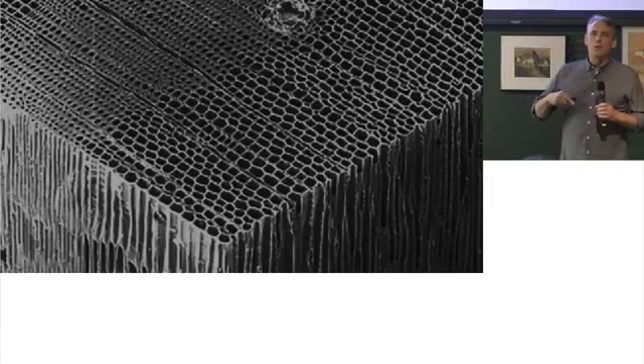And what I like about that is that it's a bit dissociated, it takes away the sort of romance a little bit of the tree as this living thing. It's analytical, and I do that with intention, because I want to talk about wood in this transcalar mode, which is to think about wood as a molecular, biochemical system, as a cellular system, and potentially as an urban system, and possibly a global system, but I'm really reaching at this point, so I'm going to be careful, and I hope you'll forgive me if I overreach.

What I'm interested in is the potential synergy between 2 landscapes which have previously been considered in conflict, the city and the forest. And the thing to remember is that forests hold carbon and cities emit carbon. So the question is, is there some way to game forest growth and sustainable harvest to produce cities made of wood?

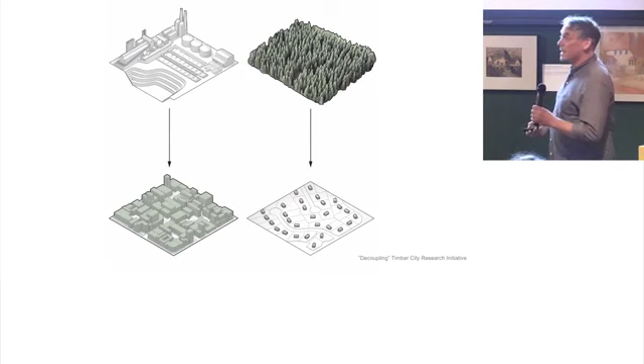Moreover, to try to disconnect, from a building technological and industrial perspective, two landscapes which are linked. The mineral extractive landscape, which produces steel and concrete, is linked to very efficient footprints, urban aggregations, urban building morphologies. And the forest, unfortunately, despite its incredible rich material range, is linked to a low-rise, low structural demand suburban morphology. So how do we break that?

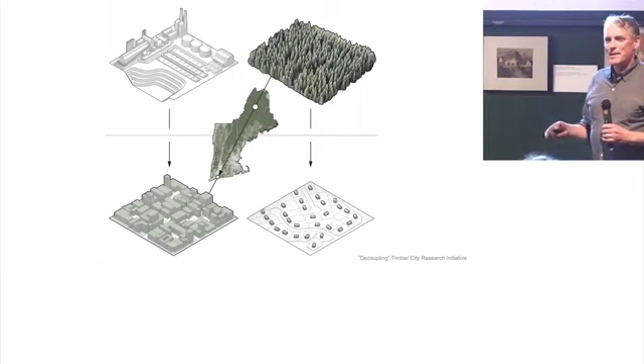What I'd like to propose is that we break it through regenerative architecture, and in particular, a regionally regenerative architecture, which cuts down on potential transport costs, which uses the feedback mechanisms of people living in forests or near forests to know if they're being over-harvested, potentially deforested. We've lost that connection. We talked a lot about that today at the World Circular Economy Forum, how people aren't paying enough attention to their natural surroundings, or I guess disturbed natural surroundings, which is most of the world.

So the question really today is, how do we move from this low-rise suburban morphology, which is America's suburbia, and one of America's greatest and most durable exports around the world. We build suburban morphologies. How do we shift that material into new forms of building, which the Europeans adopted much earlier than the Americans and Canadians, but we're trying to catch up, and produce high-density timber morphologies.

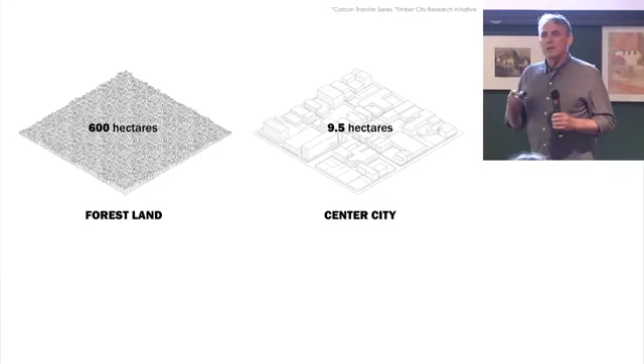I want to run this through because there's concerns about how much wood we have in the world, and whether we can actually build global cities with it, and why we would do that.

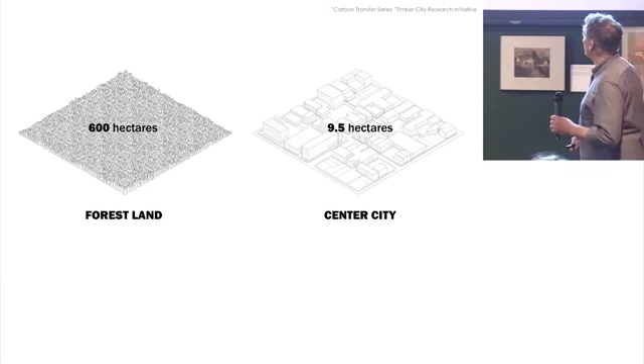So we ran a little scenario where we took a forest stand, planned a sustainable harvest, and planned to build out a city, a four-block district in the city I live in, New Haven, Connecticut. You'll notice the comparative carbon content.

We basically ran this scenario where we made 60 plots. We cut 45, one a year, to build out the buildings based on the growth plan of the city. We also studied the stem succession regrowth of each plot and calculated how much material was needed, and it was proved that the plots basically regrew, and we left quite a bit in reserve.

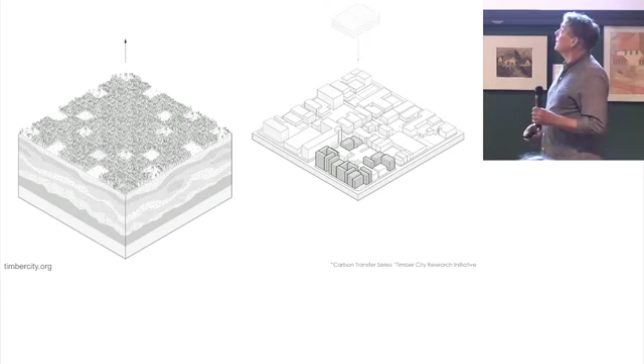We started calculating how much carbon was actually moved out of the city—starting with how much was preserved in the forests we didn't cut, how much was reabsorbed through regrowth of the forests we did harvest, how much was sequestered in the buildings, and most importantly, how much was avoided when we didn't build with steel and concrete, which would have been the conventional building material for that neighborhood.

We ended up with a total carbon bank of about 282,000 tons of CO2, equivalent to about 64,000 annual emissions of vehicles. If you start calculating the current value of a ton of carbon, it's probably worth several million dollars.

If you listen to Bill Nordhaus, a Nobel economist who described the potential for a carbon taxation scheme, he feels that by 2100 a ton of carbon will be worth something like $1,000. So I'm not going to do the math for you, but suddenly we start thinking about carbon as an economic currency, and that forest is a driver incentivized to grow and be protected, restored, and expanded—afforested. That was my long-winded way of starting my lecture, The Carbon Positive City.

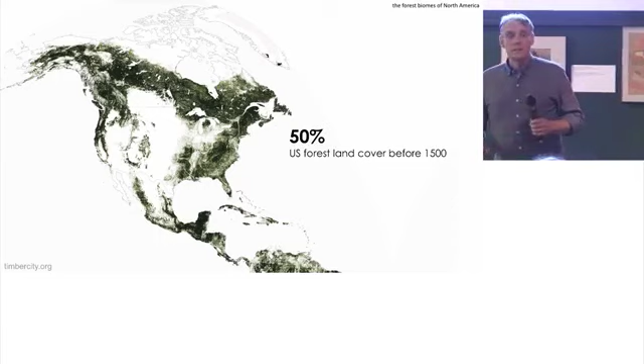In America, for example, in the US in 1500 AD, half of the country was covered with forests. Today we've removed a bit of it—we're down to 33%. Right now, US forests could sequester 11% of all emissions associated with anthropogenic activity. But if we could potentially, with proper forest management, which includes use and harvest, we could sequester and absorb 30% of national greenhouse gas emissions.

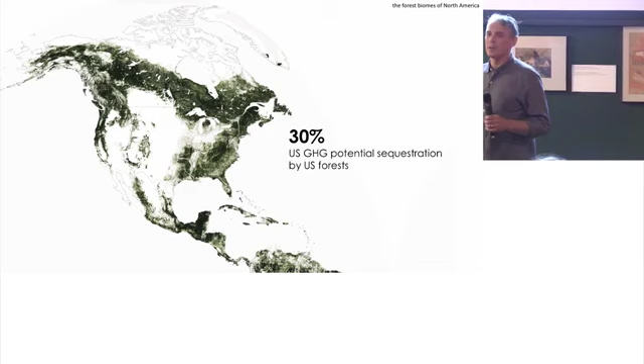You might ask, where's the rest of that going if the forests can't absorb it? We have other forest pools, other carbon sinks and pools, and we'll talk about that in a minute.

We should also start any discussion of the vast usage of timber for building global cities, which will expand inevitably, by talking about what the real forces today of deforestation are. Agricultural conversion—we eat a lot of meat, and we need lots of pasture land. And we mine for lots of things, lots of metals—we overuse metals, actually, as we know from our circular economic friends at Finlandia Hall. And building itself uses a lot of forest.

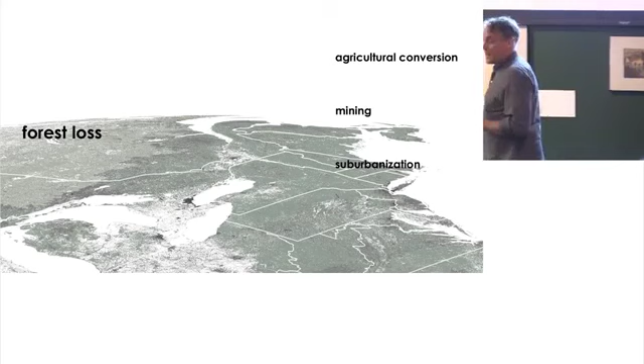And of course, climate change itself has wreaked havoc on American forests. You heard about the Camp Fire in California last year, which destroyed huge amounts of forest and released enormous amounts of carbon dioxide.

But this is really deforestation, because you can cut forests and they regrow. This is what happens when you strip the soils, which have quite a bit of carbon in them. In fact, in temperate forests, about 50% of carbon is below ground. So when you strip those valuable carbon-laden topsoils away, you get an irremediable landscape.

And we're running out of resources. We're talking about this at Finlandia Hall during the World Circular Economy Forum. We're spawning criminal syndicates that dredge illegally and collapse habitats in Southeast Asia to provide the demand for sand for concrete in India and China. And we accumulate waste, which is a problem in itself because a lot of it doesn't biodegrade, but we also remove valuable productive biomass by covering it, and we also cover it with other things, like cities. And we lose the value of those soils. Not to mention that if we keep growing as a global population at the rate we are, we will need three times the land area if we choose to build in the same way that we're building now, at the same densities.

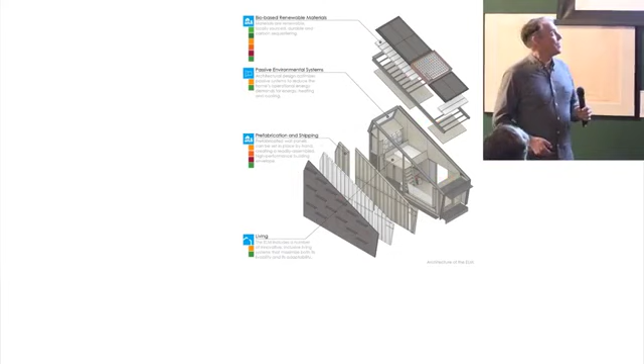Anyway, we followed all the SDGs, the Sustainable Development Goals of the UN Environment Program and Habitat, and we basically built a small building that could be trucked onto the UN Plaza. We learned later, after we'd already committed to this, that we weren't allowed to take a truck onto the UN Plaza, so that got tricky.

It was basically prefabricated in New Haven, and housed a family of 4 for a peri-urban situation where there might be food insecurity, safety issues, power generation insecurity, no grids. So we imagined it was a sort of post-apocalyptic New York. We looked at the climate zone of New York and the material supply of New York, and we went to work.

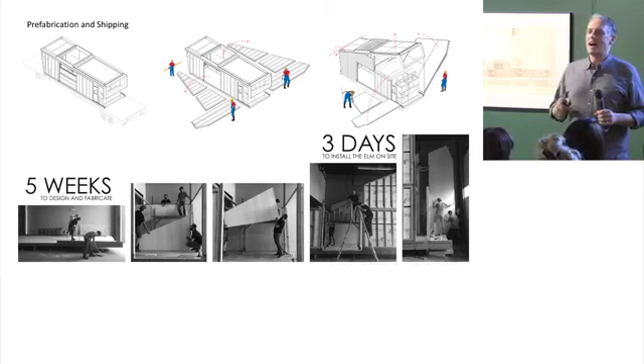We basically designed for about 4 or 5 weeks, and built for another 3 weeks. We started, and in 3 days we moved it onto the UN Plaza. I will never recover from that. Imagine taking a house, admittedly a small one, through airport security - that's kind of what it was like. My daughter, who supplied us with food, almost got arrested by the UN police.

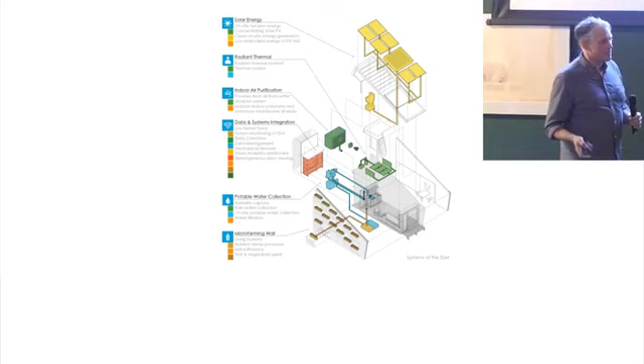We looked at the carbon sequestration or storage, which wasn't much - it's a small building, about 21 square meters, really kind of one story with a loft. We distributed the local material and looked at different systems: solar energy systems, solar generation, radiant thermal energy, indoor air purification, natural ventilation systems, potable water collection through condensation and rainwater harvesting, and finally a farming wall. It was surprising to get it there.

I wouldn't say it's a work of craft, but it was an idea about working quickly with little time, trying to think on your feet, trying to make a decent building, a good home for somebody with a lot of options. You can kind of see the layout, and I won't go into much detail.

This is the head of the Kenyan UN Environment Program, who spent a lot of time with us. He was great, and he actually said that he wanted to move in, which was nice.

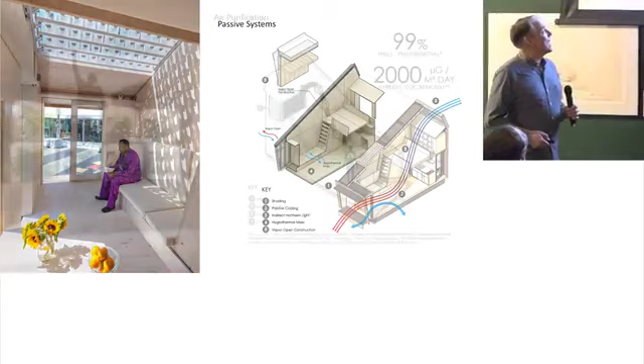We also studied exactly how the air - we measured the air quality, and it turns out that wood has really high air quality once the initial VOCs have basically diffused.

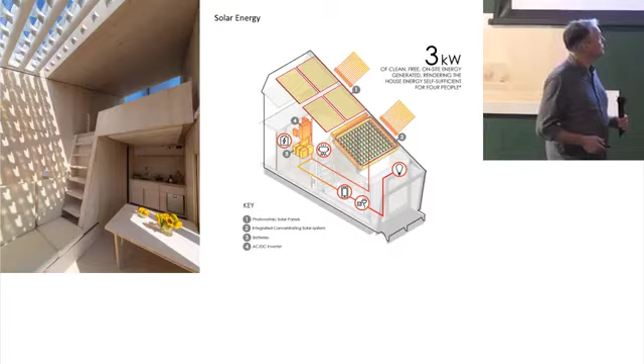This is our little mechanical room, which had 5 car batteries and could basically keep a family of 4 powered, enclosed in their house for 5 days, and produce enough water and enough electricity for that family to live completely self-sustaining. We used a lot of reused materials to make the sidings, and ran out and had to get new material - it was a rush.

We had a team of people in my office, students. We worked with the Center for Ecosystems in Architecture to develop the systems, and we made the plant wall and grew plants in it for over 2 months, producing a pretty decent amount of nutrients.

It was a hit, because people in New York don't expect to find a house on the UN Plaza, and they liked it a lot. This is the Deputy Secretary of the UN tasting basil and eating tomatoes - not the green ones.

It was a good lesson in thinking more broadly about how buildings should perform, both in how they operate and how they protect people and provide them with services, but also how they should use materials from this resource-deprived, increasingly resource-deprived planet.

So we thought about scaling up. And in scaling up, I like to think of a sort of design spirit guide, Charles and Ray Eames. My partner Lisa Gray and I have worked together since we got out of graduate school, and we wish we could collaborate like Charles and Ray Eames, the great furniture designers and filmmakers.

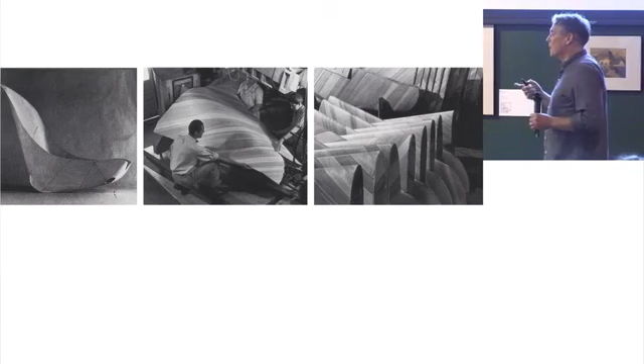What I really like is that the lesson the Eameses learned was something about scale. They made this famous movie called Powers of 10, which I recommend you see, essentially zooming in and out of human habitation on the Earth. Then they carried it into their work, scaling from a leg splint to a chair, to a fuselage for a plane or a boat hull.

They understood that the beautiful thing about architectural design and material thinking is that it scales. It can scale, and you look for the lessons in the iterations of things that scale.

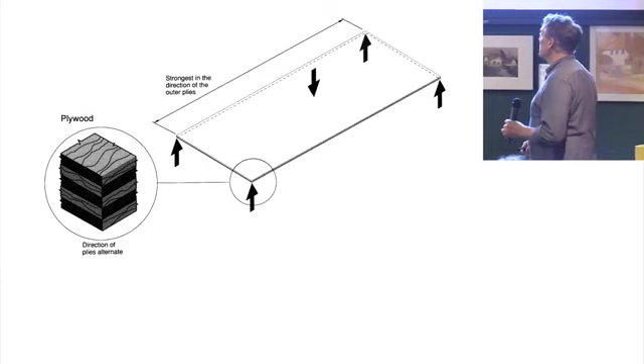So we studied the idea of stiffness in a project we did in the late 90s, renovation of an old firehouse for an acoustical music studio. We bought a bunch of plywood and tried to see how far we could bend it in two directions. How stiff would it be?

We created an acoustical shell, and we modeled it physically, testing it using different techniques of tuned wood mock-ups. We measured it and gave it to a Swiss acoustical engineer who promptly wrote back and said, I can't model this, it's too complex.

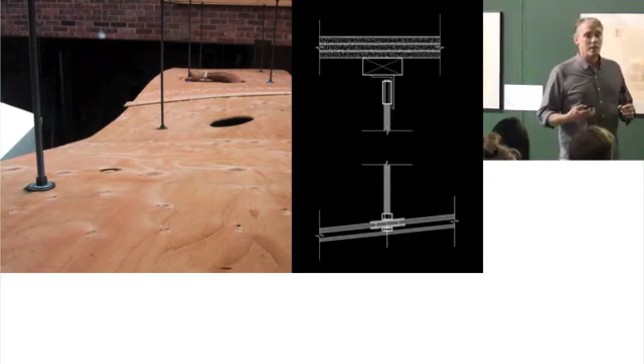So we essentially used these different threaded rod systems to produce an acoustical shell that was acoustically dead for a recording studio and very live for performance, and that was a kind of complex design process.

And we designed an acoustical diffuser at the stage to produce these sort of vanes which twisted and warped to diffuse sound for the musicians, and also to serve as an air return duct.

We stole a little detail from one of Charles and Ray Eames' furniture patterns, this relieving cut where we cut a circle out of the end of a kerf cut, a saw cut, because we found that when we were warping that, it split. But when we could expand the tensile area around a larger surface area, it wouldn't split.

And that became a kind of motif. The room seats about 70 people, and a crush, and the piano you can hear. It's incredibly how live, how rich wood is, and we know it's a great instrument material.

And here was a big room that was an instrument. You can hear the hammers on the piano coming down before it hits the string. And it's so incredible. And we were renovating this firehouse, which had been abandoned.

We were able to, through the brilliance of our client, Nick Lloyd, who runs a record label there, produce essentially a home for himself and his wife, who's a painter, and then their children, and a bar in the basement, and the recording studio, and the record label. Visiting musicians started coming, and it was really successful because of his vision.

And he lived in this amazing sort of relic of 19th century New Haven industrial space. He asked us, once he decided he was going to house visiting musicians instead of making them pay exorbitant hotel prices in New Haven while they were visiting, to build a dormitory with 3 bedrooms on top of the building.

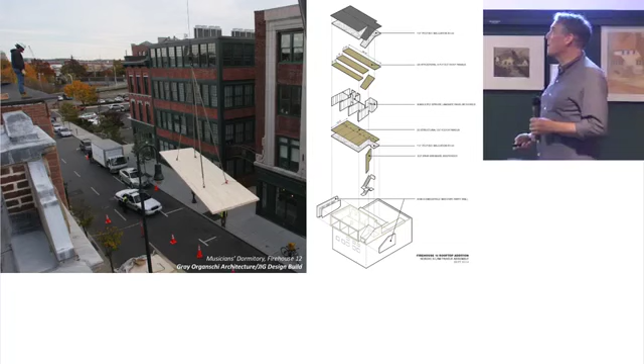And we quickly found out that the building couldn't support it because it was an unreinforced masonry building. So we chose to use mass timber, cross-laminated timber and glulam, to stiffen the building with a light structural material that would essentially keep it up under the load it held.

So we have a stairway up into a hallway with a little seating area for musicians to play, a couple of 3 bedrooms and a little bathroom and a WC. And it's sort of created this new urban lawn on the roofs, and it's created more density.

What was the real discovery was that we could plop this building down on top of an unreinforced brick building from 100 years earlier. A developer contacted us and said, I want to add two stories to the other building next door, and we designed a restraining system using cross-laminated timber cores to produce a hotel two buildings down.

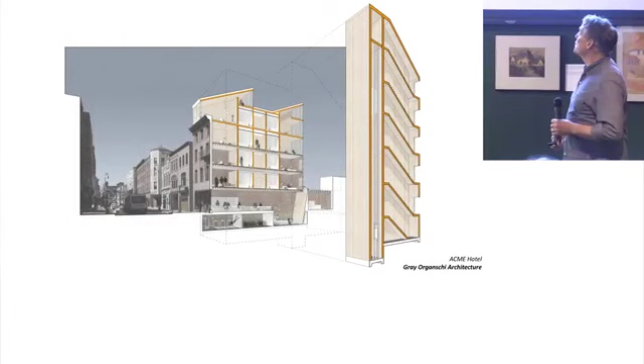Then another developer called us and we designed another building. I won't go into the details, but suddenly the city economic development coordinator was saying, oh my God, we can actually get more density in our city using wood because we can't do it with steel, it's too heavy, or concrete. So this is a great model and we'd like to pursue it.

That brought us to an idea about this notion of structural biomass. Why aren't we using this great plant material that's so abundant and photosynthetically productive? It provides so many ecosystem services. Why aren't we using it for our buildings? Because we know it will regrow, it will regenerate. We've been talking about renewable materials for 60 years.

So we began to study different scales of using round wood to produce structure. That was a school. We worked to produce this apostolic community center for some Jesuit priests who said they wanted to be stewards of the environment, and they wanted to follow their vows of poverty and celibacy.

That reminds me of a funny story. We were having dinner with the rector, and we had a really nice bottle of wine while talking about the design. Another visitor, a lay person, after the sumptuous meal, said, man, if you guys do celibacy like you do poverty, sign me up.

Anyway, the building is a lot of wood. We designed it as a wood structure. The university that sponsored the building decided it wanted to do a LEED platinum building, and we learned that you get more credits for recycled steel, despite the enormous smelting energies that go into steel recycling, than for a wood structure, because wood was essentially politically knocked out of LEED for quite a while. Recently it's been reintegrated through a material credit.

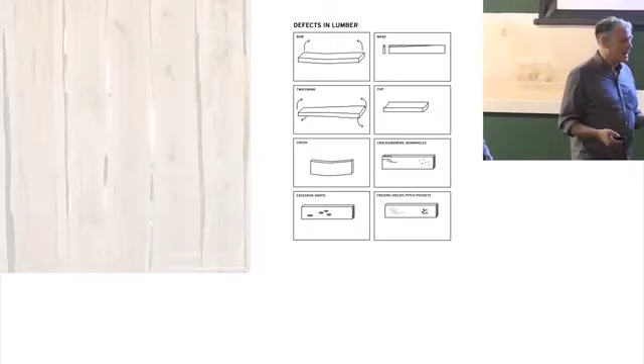So we wanted to deal with this issue of scarcity through the wood, and we studied all the different kinds of flaws that exist in lumber and embraced them, creating screens for the chapel, privacy screens between the public spaces and the more sacred spaces, and the altar and the ambo and the crucifix and the baptistry, the baptismal font.

The idea was to embrace all of the material coming out of the forest, not just the superfine, the sort of rock star trees that everyone wants in their beautiful cabinets in Manhattan, in their kitchens and bathrooms, but to try to understand how we might use solid wood with flaws, with spalting and rot, and consolidate it into a meaningful piece of furniture.

But the thing that really gets us excited is the technology of contemporary wood engineering and glue. When we saw this, I showed this in 2012 at the Aalto Symposium, when we saw this famous experiment, which Juhani Pallasmaa called the man-made tree, we saw it as a sort of repository of lots of adhesives, lots of technically interesting adhesive.

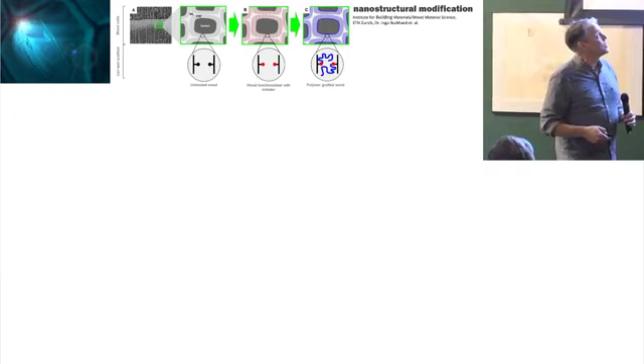And we went to work thinking about all of the different things going on around the world, inventions, the sort of revolution in bio-based materials, biogenic materials, which is happening right here in Helsinki at VTT, or across the Atlantic at the University of Maine in Orono, which found a way to mechanically produce nanocellulose and are pressing panels out of it, or the work by the folks at ETH Zurich on cellular nanostructural modification of cell walls using polymers and mineralization to create greater rot resistance and fire resistance and all these kinds of exciting things.

And these different techniques of adhering wood - we're even starting to look at lignin-based glue so that we're not actually using fossil hydrocarbons to make glue. And then Achim Menges' work at the Institute for Computational Design, where he's looking at the natural hygroscopicity, the water-loving character of wood, and how it can change to produce apertures activated by moisture changes.

But I like the dumb stuff - the stuff that's ready at hand that we're making. We've been making glulam beams for a century. We've been making CLT for 25 years. Petra, you can correct me on that, but it's been decades we've been doing this stuff.

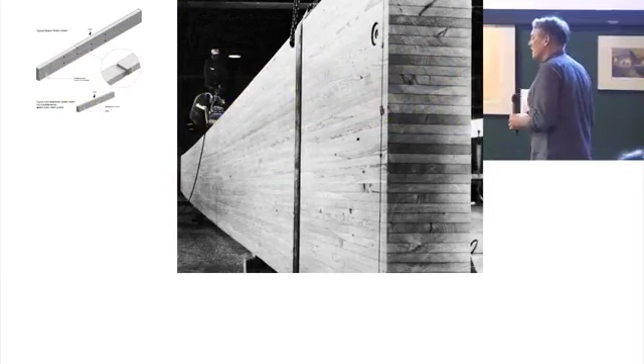And really the tool is a finger jointer to make long sticks and glue to laminate the sticks together to produce massive members with enormous capacity. And now we're only realizing that we can use them in the way we used heavy timber industrially in the 19th century. It's fire resistive.

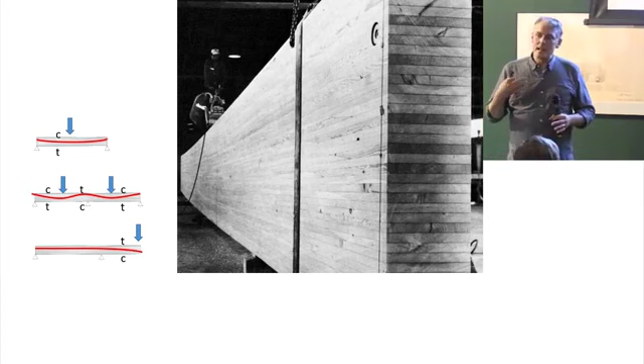And it already knows how to manipulate the different quality of fiber that comes out of the forest by putting the best stuff along the structurally most demanding edges, the tension edge, the second best stuff along the compression edge in a beam, and then you can load the cheaper stuff in the middle, which means you're using more of the forest that you cut. I think we haven't yet fully understood all of the potential of that capacity we've been using for years, creating different kinds of structural configurations.

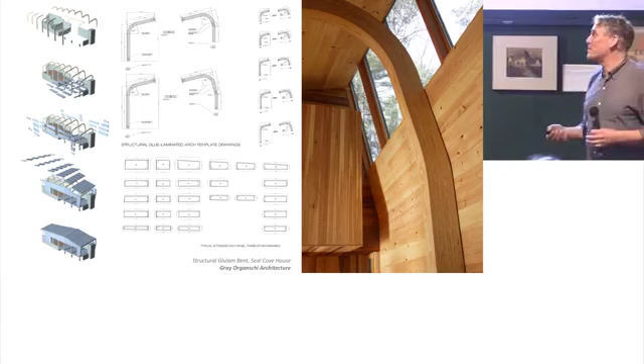And so we started making lots of buildings out of curvy glulams because we liked the shapes, and we made houses out of it, and I think our clients tolerated it. And we misunderstood certain things aesthetically because we liked the shape of this beam lying on the ground before it was put up.

So we made a bridge out of it and gained the capacity of the manufacturer to produce a construction bridge with a 10-ton US ton capacity, which we watched a 30-ton truck drive over, which was very interesting. But what happened was it sprung back into shape, and we thought, oh, wood actually is resilient structurally.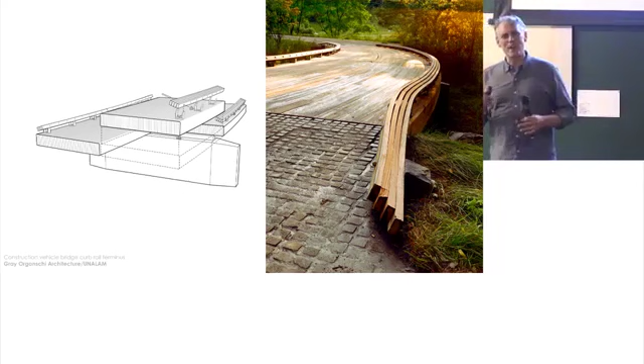So we made a number of bridges, and I'll move through this quickly - it's a kind of passion of ours. We get asked to make bridges because people think wood bridges should be in woods. It's the correlation that people seem to like. And we really worked with our partners as glue laminators to produce essentially treated bridge systems.

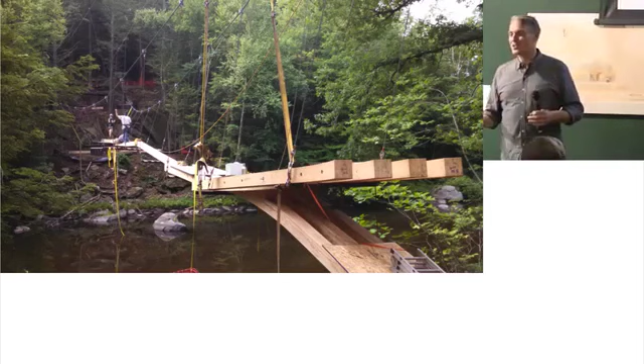And we made our first suspension bridge a few years ago, and it was a challenge. Our company, Jig Design Build, rigged it - we have one of the builders here in the audience. But we got it straightened out, and we made this bridge named after Henry David Thoreau, one of the pioneer environmentalists in the US.

And people use it, and they love it, and I think they love it because it's not made of plastic like a number of the other bridges up and down the river. It's made of solid, thick material, which because there are not a lot of little joints, it's more resilient. It lasts longer. It's more durable.

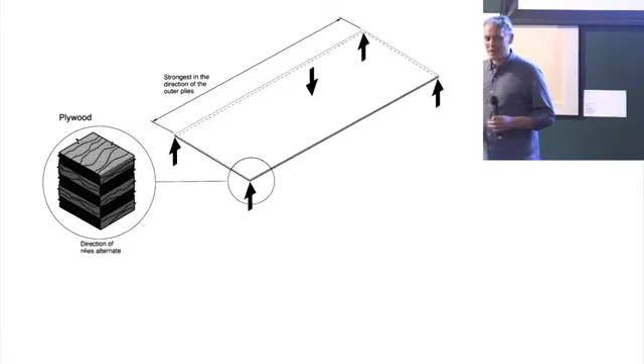So mass timber has a lot of possibilities. And then the CLT revolution comes along, and the Americans figured it out, I don't know, like 18 months ago, it feels like. Meanwhile, Stora Enso and KLH and a lot of European manufacturers have perfected it and can still beat the pricing of American CLT manufacturers. They just stole the idea of plywood, transverse lamination, and produced it with sticks.

As you all know, you can produce all kinds of fascinating configurations. These slides are so outdated now, given what's available. I need to get on the stick and find some new pictures.

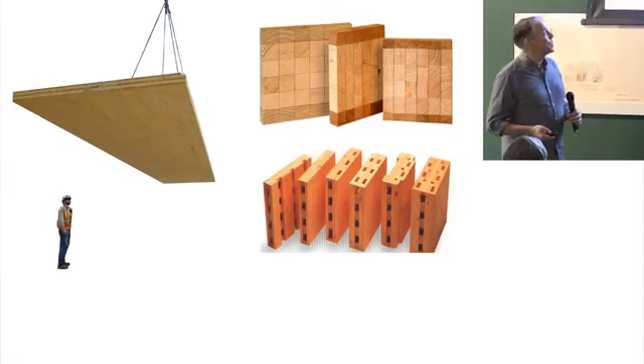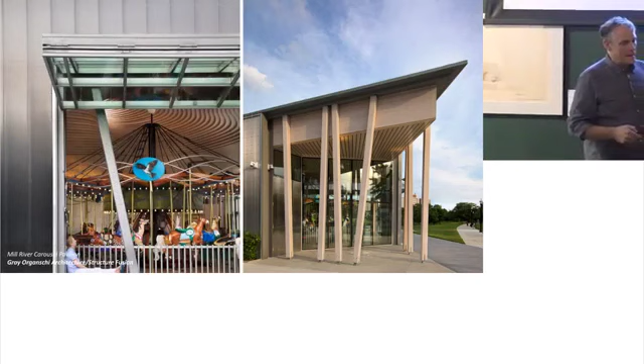And meanwhile, we were building in the city these little tiny buildings, kind of bespoke community buildings - a merry-go-round building made out of just posts that canted to create structural lateral resistance. We gave the engineers a nice thick roof structure so that they could use timber, and they made it out of steel anyway, because that's one of the issues.

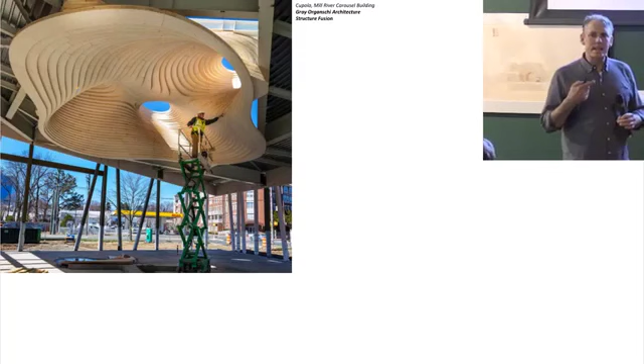We had a great fabricator in Quebec who worked with Belgian, Austrian and French fabricators to produce this cupola made out of a kind of topography of cross-laminated timber, which had three skylights and rotated in the opposite direction of the merry-go-round. It shows you that wood, because of the manufacturing capacities it allows, is so amenable to digital fabrication that it's easy to build something like that in a factory off-site, ship it, with the precision to produce this in a matter of days.

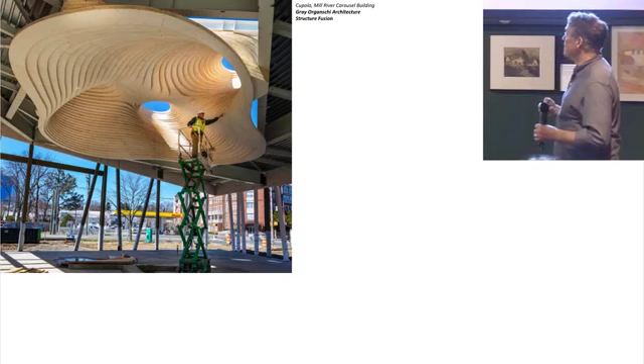It was a fabrication project done in a factory but assembled by steel riggers, because the company, Canam, which is the largest steel manufacturer in North America, bought a timber fabrication company as a kind of climate change scenario—they know wood is the thing of the future, and their guys know how to lift really big pieces of material high in the air with cranes.

So we built this, and it took a long time to convince anyone in the city of Stamford, Connecticut—a city of about 200,000 in the greater metro area—to build this for the kids. It's a public merry-go-round, costs 25 cents to ride, and they ride around. I look up and get a little seasick, but the kids seem to like it.

So here we are—we've been experimenting with making wood in the city in kind of little stabs. Meanwhile, our friends in Vancouver and Austria are building multi-story, huge buildings out of timber, and we're playing around with one-story event spaces. But what was interesting to us as we watched the proliferation of wood architecture was the molecular aspect of wood.

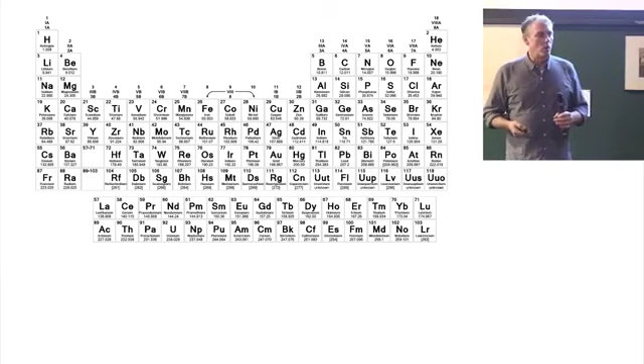It's made of carbon—half of it is carbon. It's a carbohydrate, like spaghetti. Carbon is an interesting element: it's the 15th most prevalent in the world, and the 4th most prevalent in the universe. It's called king carbon because it produces an array of different polymers at Earth's temperatures and pressures, so it's hyper-abundant. Whether it's hard and transparent like diamond, or soft and dense like graphite, it exists everywhere in many kinds of conditions.

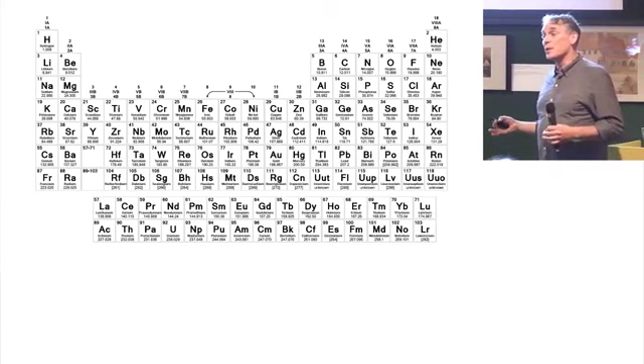A colleague of mine, an industrial ecologist at Yale, Tom Graedel, one of the early thinkers about life cycle assessment and material flow analysis for industry, likes to hold up his cell phone and say that nearly all the elements in the periodic table are in it, short of the radioactive ones—a daunting thing given that the buildings we make today are much more sophisticated than our cell phones, with much more material and a wider range of material. If you apply the throwaway culture of cell phones to buildings, it gets a little scary.

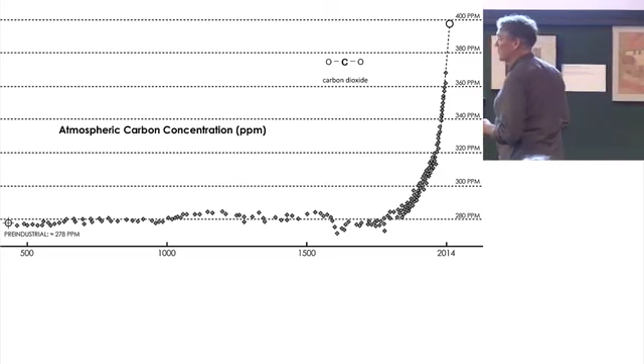We've seen since the Industrial Revolution a sudden spike in carbon concentration. Not surprisingly, if you map global population against carbon concentration, you'll see it's coupled. That's what people in the industrial ecology and environmental worlds worry about, because when we consume as a species, we produce—not just because we breathe, but because we make a lot of stuff. We're makers, homo faber, and we emit carbon. That correlation is very strong.

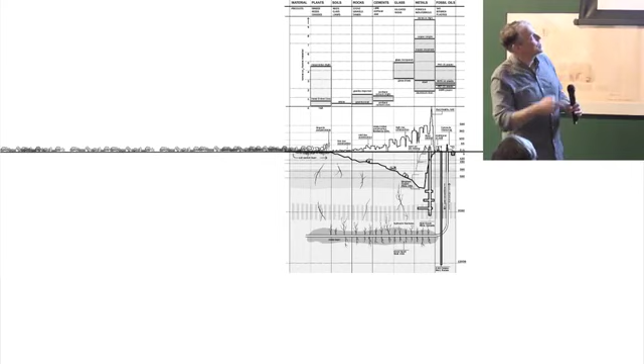In doing so, we've actually dug down through that precious layer of bio-rich soil to create a kind of hole for ourselves. These are all the different material classes—we start with wood and move all the way down to the fossil hydrocarbons that fuel manufacture. We learn that we've dug ourselves into a deep hole, existential, environmental, global. In fact, many scientists have noted that human beings have now disturbed every geobiological, geochemical, and geophysical system short of the tides.

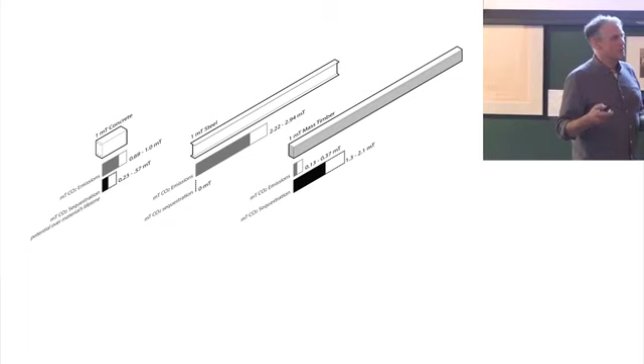Anyway, back to my point. So this is a strength-to-weight ratio of concrete, steel, and wood. We know wood has a really high specific strength, strength-to-weight ratio. But if you take into account span versus carbon emissions or carbon footprint, you learn that a wood beam actually spans a lot longer than a piece of concrete. It's a conceptual model, but basically what we're saying is you get more environmentalism, less carbon footprint, for the spans you get out of mass timber.

Which should be an economic incentive for anybody. If you remember that basically half a metric ton of carbon is stored in a metric ton of mass timber—or choose your unit—we can start thinking about how wood, as well as carbon, can be a bit of a currency.

I want to tell a story, which Matti will be commenting on soon, about a school that we made. It was a farm school in New Haven, Connecticut, serving inner city kids who have very little access to farms or nature, and they study ecology and agriculture. They asked us to build a building for them on this site, a former farm site.

Their classrooms were here in this old building. There were their farm fields. Basically, it was a dump that had been excavated out of a mountainside, so there were lots of drainage problems. And they asked us to build an ecological building.

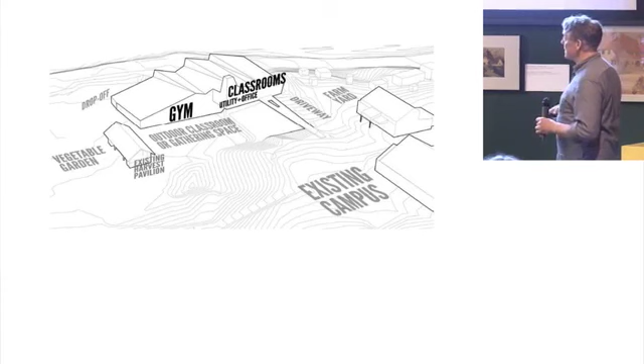So we designed a classroom building which had a gym—they could only afford a half gym—art classrooms, two science classrooms, offices, and it would create a new space of entry for the school because they were parked on a hillside. We used the building to navigate that sectional change.

It's fairly simple, I won't go into too much detail, but the building has this half basketball court, which also serves as a gymnasium, a rec space, and a theater. Most of the offices and bathrooms are downstairs, and upstairs are classrooms, which each look into different areas. We decided we're going to throw everything at this building.

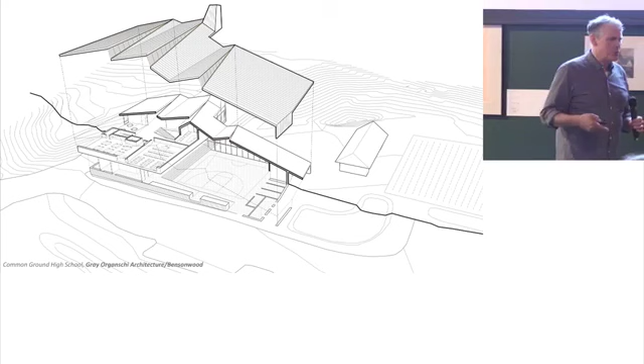The roof was going to become a really important element in the building. It was going to allow natural daylight to reduce electrical illumination costs. It was going to be super, super insulated and airtight so we could optimize our thermal performance. We lined it on the south—the roof pitches optimize the angle for solar photovoltaic arrays, which would power the geothermal pumps that ran the school.

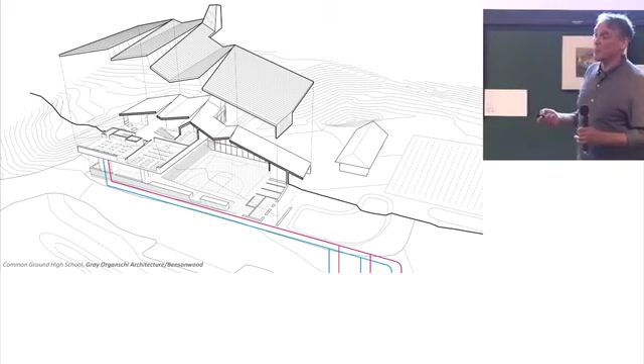It's really hard—American school systems are a wreck. So the idea that a public charter school could get the bond issued to produce the school was a big deal, and it was really a tribute to the administrative team. They were incredible. And we've got all this stuff in there.

We developed bioremediation pools and artificial wetlands, which became outdoor classrooms. But we argued that the thing that would be most beneficial was to use regionally harvested wood to build the building, and to use it as densely as possible, and to use these new technologies that would allow the structure to be the finish as well as the structure, so we wouldn't have to cover it up.

So we looked at black spruce from Canada, not too far away from us, about 580 miles, and a manufacturing company that was using this black spruce that grows in little thin strips, 8 inches in diameter maximum, very tiny. No one in their right mind would harvest a piece of wood like that. But that's where they work, and they figured out really wonderful lamination systems.

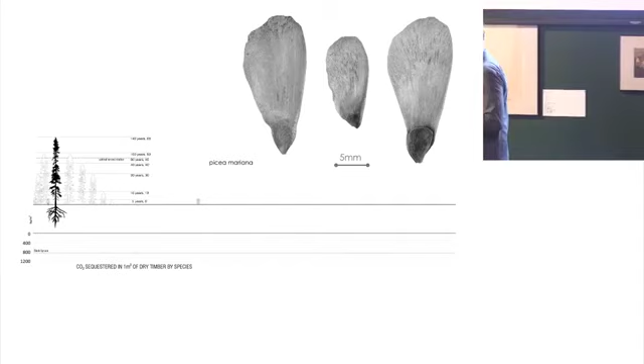We studied how long it would take to optimize growth, how to optimize carbon sequestration in the forest, when we should harvest it, how much carbon would be stored for all the species that went into the building. Then we began a kind of transfer of that material conceptually through all of the different products we were using, from finishes to structural components, into the building.

And we tracked exactly how much carbon would go in and through the forest. So this is what we are calling the carbon transect. We measure off that line. This is the stored carbon, this is the emitted carbon during production and transport, and this is the carbon that gets stored through the body of the building. So we learned we get to store quite a bit of carbon.

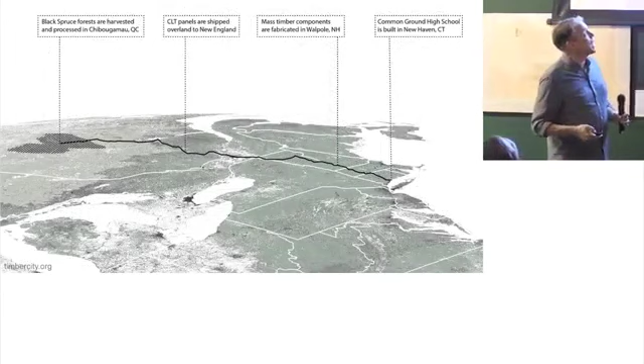We took into account the fact that the material was manufactured in Quebec, produced in Walpole, New Hampshire, and then shipped to New Haven. And this is the story of the construction.

Five guys and a crane. The whole assembly was put together in two weeks. And then the sidings went on, and we learned that there's a whole way of getting more advantage, optimizing the prefabrication more, which we would do next time.

The building now functions for 220 high school students and 15,000 New Haven residents every year through different kinds of programs, camp and farming programs. The building is made out of wood. This is a glue laminated bridge which replaces what would have been a concrete egress stair.

And we have a little bit of steel in there because wood can't do everything, when architects like to make things very thin, wood might not be able to do that.

And the building is lined with cross-laminated timber. It's really an industrial product. As if there were an exposed brick wall, we would love it, right? But wood structure, people don't think about so much. These are just big plates of wood that reflect light beautifully, treated very cheaply for this rather resource-deprived school.

And all the public circulation spaces are made out of wood, cellulose fiber, and there's some concrete in here too. We'll be talking about that.

It's really interesting. When we finished the school and wandered around, the kids were talking about all the ecological principles that went into it. We would ask them, what do you like most about the school? Hoping that they would say, oh, the daylight is beautiful, oh we love the shapes, the roof shape is so cool. To the one, they said that they thought the building smelled good.

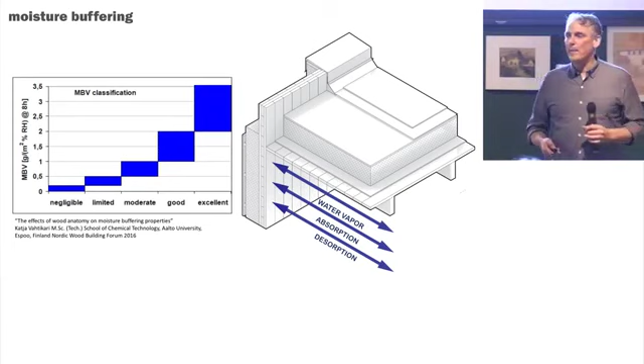And we've also learned that with this property comes a phase change from vapor to liquid in the cells of wood, and that may have energy implications, so-called hygrothermal mass, which is just being studied here at Aalto University and other places like the Norwegian University of Science and Technology.

Christina Nora is a colleague. But basically it's just a building, right? It's a building that could be built out of wood easily. It's not a big deal. It happened to be one of the first buildings in the US to use cross-laminated timber, but it's otherwise just a nice place. We're proud of it.

The kids seem to like it. The teachers like it. They celebrate graduation inside that room unless it's really sunny, and then that's where the speaker stands. But there's a kid playing basketball, and it's a farm school.

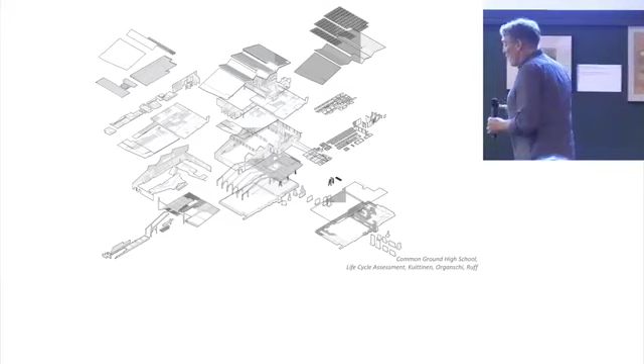What we decided to do was, with the help of Matti Kuittinen, essentially conceptually take the building apart to try to understand what its impacts really are. Through this carbon book project that Matti and Pekka and a colleague of mine in the US are working on, we started studying the impacts of the building.

We looked at what elements specifically were emitting carbon, and Matti will talk more about this with much more insight than I can offer. As you'd expect, electrical elements require a lot of heat for formation. Site and groundworks can disturb a lot of soil, and we pave things, so we lose carbon that way. And concrete foundations are a big producer of emissions.

But if you look at storage, it shows a different picture. These offsets start to become really valuable because the wood material, and also the plantings and the new very productive soils that we tried to protect with the farmland and wetlands, actually can store carbon.

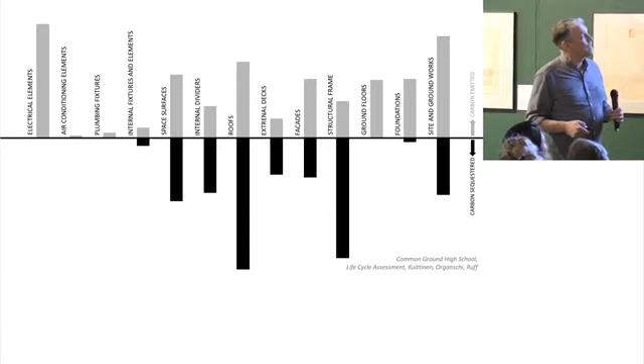So we made this sort of monstrous drawing, which shows everything below the line stores carbon, everything above the line emits carbon, and if it's bigger, it stores more carbon. It's one of those useless drawings that architects like to make. I like it a lot.

But it's really a way of saying that there's a monstrous condition happening, which is that we can store and emit carbon at our will, and that at our will is a really important part of this discussion.

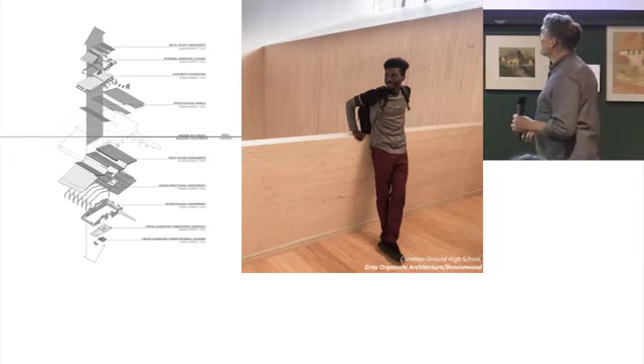This young guy worked on a study with us. He took our building information model, we taught him how to do it, and he quantified all of the material. He counted up all the weight of the wood in the building, and he learned that there was 450 metric tons of carbon dioxide stored in the building, which is worth 100 cars' annual emissions, which is a great project-based educational opportunity for kids. He was I think he's going to be a major scientist.

This guy was amazing. And that brings me to really the end of what I want to talk about, which is this idea of bioeconomic building scaled up to some of the themes, and this relationship we talked about.

I quote Lionel Robbins, who is the founder of the London School of Economics and who defined economics as a science which studies human behavior as a relationship between ends and scarce means and alternative uses. That's what we're talking about today as a planet.

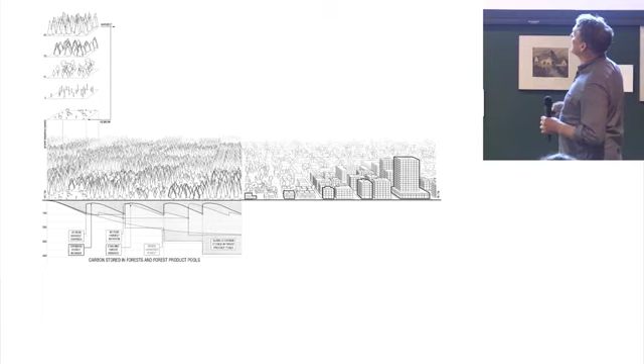So we took our common ground model and we started studying exactly how much carbon we could store, how often we could replenish a harvested forest cut, how to move those forests of different species through our commercial products that are available right now into buildings.

And we looked at suburbs, more suburban kinds of structural morphologies and assemblies. And then we looked at high mid-rise buildings.

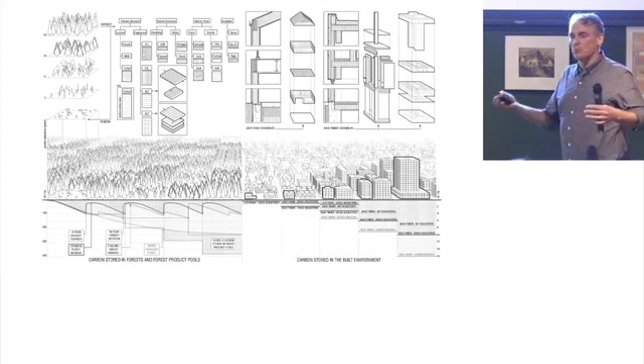You can see, remember my carbon transect, below this line are the storages. So this upper line is a reflection of cyclical growth and death of forest fiber, which emits carbon. So whenever it jogs back up, it's emitting the carbon because it's rotting aerobically mostly.

This is what happens if you don't let the logs lie in the forest and rot, but you actually use them productively. Again, I'm showing my technological bias, so forgive me. This is what's stored as we shift this material into these large urban buildings.

And so we thought, okay, what would happen? This is just a thought exercise, so forgive me, but we actually did a paper called Buildings as a Global Carbon Sink with a group of European scientists and some American scientists. We basically tried to imagine how much wood we would need to build all the buildings required to house the new global population explosion, the next 2 billion people who are going to inhabit the Earth.

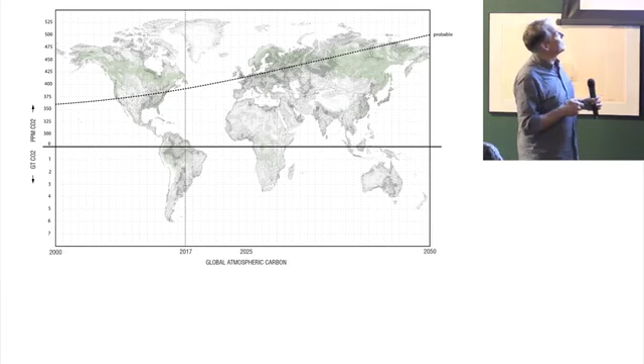And this, again, is a carbon transect. Below it is carbon absorbed and stored. Above it is carbon emitted. This is already out of date, this was drawn in 2017. We've surpassed 400 parts per million in the atmosphere, which is 50 parts per million above what is considered a sustainable density.

And that's the 2-degree temperature rise that we came up with, which has now been revised by the SR15 IPCC report to 1.5 degrees so that we can save some of the Pacific Island nations from being over-inundated with seawater.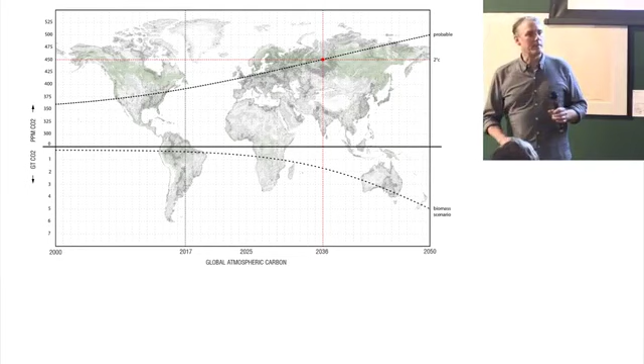And then we looked at how much carbon could be sequestered if we built all the new, just buildings, occupied buildings, not infrastructure. It was an estimate, of course, and we learned we could, basically within a range, store about 5 gigatons of carbon in the built environment, which, by the way, we're going to build anyway, right? So it's either going to get emitted or it's going to get stored.

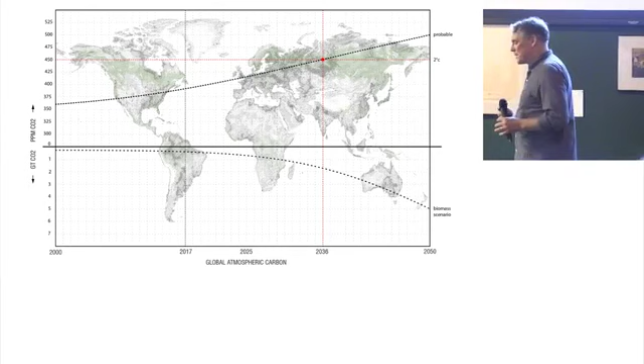And then we looked at what would happen if we use this biomass scenario. What would happen to the upward accelerating curvature of emissions? And we found that we bent it down. Now, this, again, is an average, so you have to forgive the license I'm taking in talking about this.

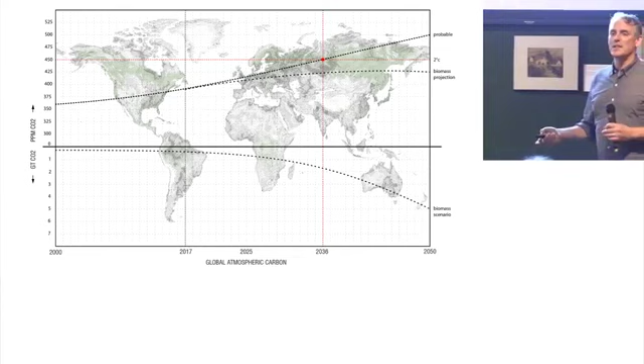The point is, we're going to build a lot of buildings, we're going to emit a lot of carbon, and we can store a lot of carbon if we can forest the world's forests, the right forests, sustainably. So that temperate zone and the boreal forest here is going to be an important provider, and we'll use the mechanisms of global economics and exchange to hopefully transition to post-agricultural waste products in the global south where there's less timber. We have a colleague in Indonesia right now who's making rattan glulam, which is a weed.

In a sense what we've done is we've rewritten the history, or we're rewriting a future history of global carbon. Starting with the Carboniferous era, where the fern-like trees and the low number of aerobic bacteria that wouldn't digest cellulose basically consolidated into this vast fossil hydrocarbon pool in our lithosphere, to the point of the Industrial Revolution where we start digging out that fossil hydrocarbon and emitting it to build our buildings and fuel the manufacturing processes.

And then finally, through a new set of kinds of assemblies that maybe we can use, again, carefully, to produce a new biospheric building, which relies largely on renewable resources as well as industrial waste streams.

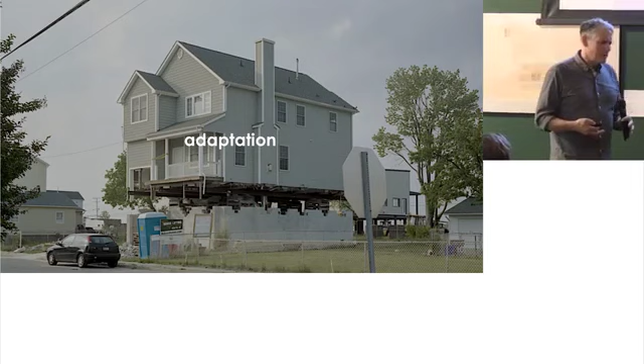So to this economic exchange, we know in the eastern seaboard of the United States, I think it's less of an issue in Finland, but in the US, we have flooding all the time. And architects love to adapt to climate change. They talk about resiliency as a means of getting more work. We can build our way out of this problem, and yet we'll just exacerbate the problem in the process.

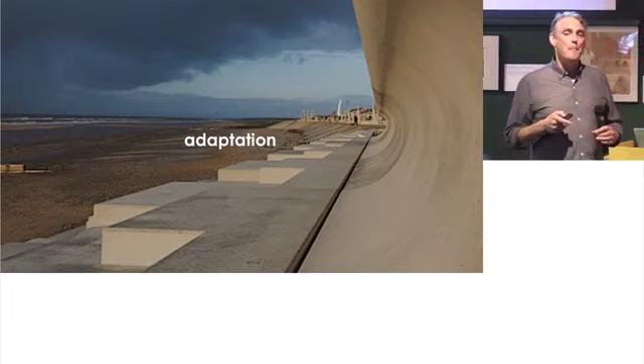I love to do the life cycle assessment on this concrete seawall. It will certainly last for a while, we hope. And then the other option, which I think is less considered by architects and environmentalists, is that the built environment could mitigate climate change, which is what I'm talking about.

And what does mitigation look like? It probably looks like a robust forestry, sustainable forestry system, incentivized forest restoration and afforestation, growth of new forests. And it has a lot of great, hopefully pleasing wood architecture in beautiful convivial densities like Helsinki. Thank you.

Millions of questions in my mind, but do you have any in the audience? We might have a few before Matti starts, or should we leave them at the end? Any burning questions?

Anyway, one of your subtitles was something like mistaken by craft. I think Matti's title is much more forgiving, do no harm. I don't know what it means, but we'll hear about that.

Hello, good evening everybody. So as I was already introduced by Pekka, my name is Matti Kuittinen. I work in two instances. I work at Aalto University as an adjunct professor starting 4 days ago, and at the Ministry of the Environment as a senior specialist. So that blends the two professional loves of my life, policymaking and teaching and academia.

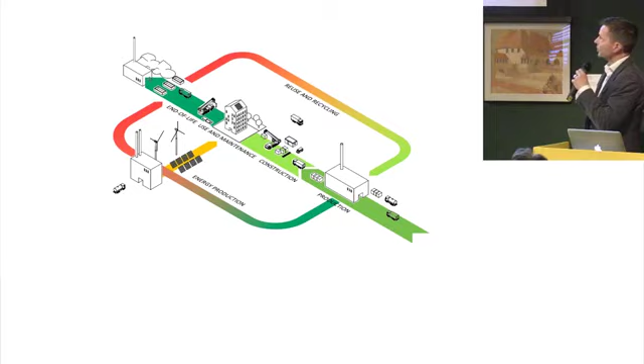But to bring more perspective, I'd like to take you to a case study: Alan's and Lisa's wonderful school. It's a very nice building, and I had the privilege of getting full access to the building information model and all the material bills of this building. Together with my colleague at Aalto University, we made a calculation exercise.

We tried to figure out how large the carbon footprint of the building and its site is. Then we wanted to know if it would be possible to reduce that without touching the architecture and geometry of the building, of course. And then we wanted to see how large the carbon storages and sinks are around the building.

Now, unfortunately, we are going to the boring part of the presentation where I'll be showing graphs and figures, but let's hope you can tolerate that after seeing so much eye candy from Alan's previous presentation. So let the boredom begin.

So the balance has already shifted from use of energy to these so-called embodied emissions. To explain that a bit more, I'm using this graph—you saw that in a more eye-friendly format in Alan's presentation. Everything on the right-hand side, in orange and red, are emissions—bad things—and the green ones on the left are good things. So here we have all the parts of the building, and here we have how much emissions are caused from these building parts.

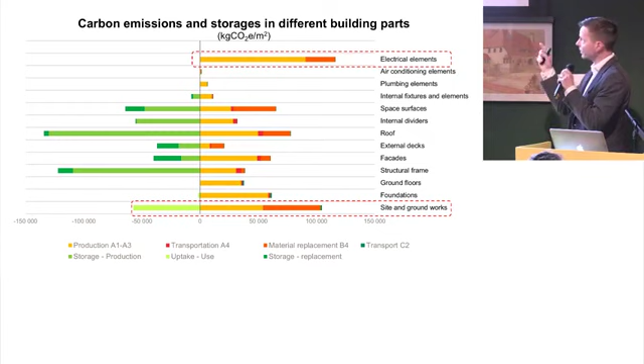But we should think about the principle of do no harm in this instance. And then the second interesting thing is that the site and groundworks seem to cause relatively much emissions, although there is also potential for sequestering carbon on the site. Now let's take a more detailed look at these.

First, if we look at the site, as Alan described, there used to be a site without any buildings, some trees standing there, then some soil was removed, new soil and gravel brought in, asphalt roads done, concrete paving done, and the building was built. While this was done, there were lots of emissions, mostly from making asphalt for the roads, but also from concrete paving and plastic pipes and so forth.

In the graphs on the following slides, I'm going to show you three things: first, the emissions; then how much carbon was either stored or sequestered; and what could have been done otherwise—what could we avoid if we chose a different approach?

So we can see that if we just look at the site, it's the asphalt road and concrete paving that cause most of the emissions. But luckily, the soils of the site in this building, while the building is operated for 50 years, there are herbaceous plants, grasses, and trees growing, and all these natural processes or ecosystem services accumulate carbon from the atmosphere into the soils. That's actually more than what the production of asphalt causes.

So lesson number one: we shouldn't underestimate the role of ecosystem services in our building projects, and this is something that is very poorly understood, especially in the urban context, unfortunately.

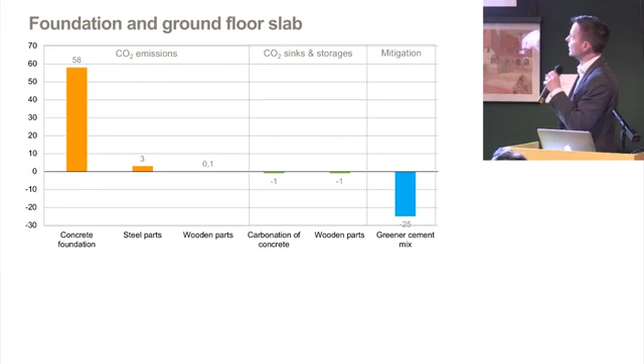But then again, you need to realize that in a typical construction project, you have other aspects than just the carbon footprint. There's fire safety, acoustics, and also the price. So gypsum board today is positioned so well in the cost optimum of construction materials that it's really hard to defeat in the construction markets.

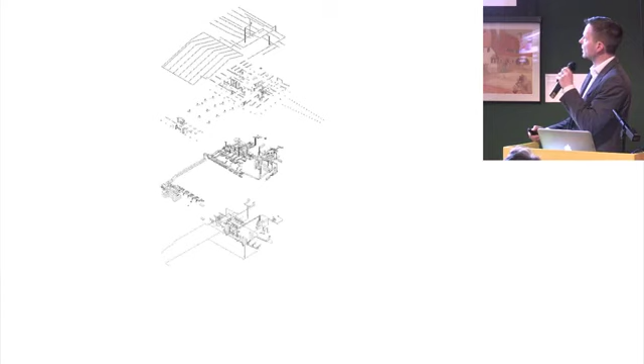However, there's good news. There are so many ways of making solar panels. These are made from monocrystalline PVs, which is one of the ways of making solar panels. It's the most common today, and it has the best price to kilowatt-hour ratio today.

However, if they would use thin film solar panels, we could cut this emission into half, while keeping roughly the same level of renewable energy sequestered from the roof of the building. So I think architects, engineers and designers should pay attention to what are the options of harvesting renewable energy in the building, because that can really lead to making harm or making no harm in the building.

But still, if we are using these solar PV panels, the monocrystalline panels, the emission savings with these are huge, nevertheless of the emissions that they are causing in their production phase.

Now, depending on what sort of scenario we are imagining for the electricity's carbon footprint in this area, using solar PVs in the building can save from 370 to almost 1,000 tons of CO2, because you didn't have to purchase electricity from the grid, which has a certain carbon footprint in this area. So even though they had a big carbon footprint, that was an investment worth making.

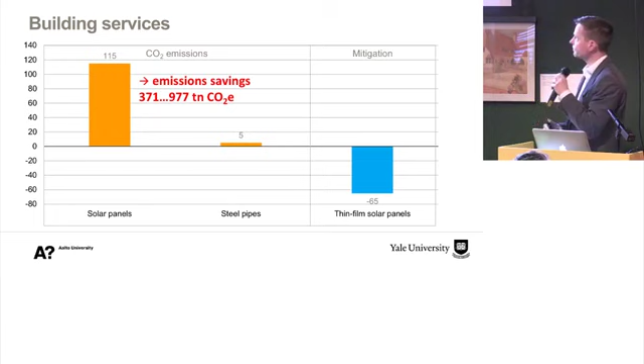Then if we sum up all the mitigation potential that we have in this building, what could we have done otherwise? It seems that greener solar panels is the greatest thing you could have done otherwise, and greener cement mix, obviously. And then if you switch gypsum boards into wood, that has an impact, not that large, but it has an impact. And if you could use recycled asphalt on the site, that would also make some difference.

But the big gains are here. These are the low-hanging fruits that we should take into account in the next projects, and maybe you are also already taking these into account. Oh yeah, that's great to hear.

So this mitigation potential, all summed up, is some one-fifth of all the emissions that are caused when the building parts were manufactured. Now that sounds like a big number, but unfortunately when we scale that up to the life cycle emissions of the building, it's only 4% of these emissions.

And this leads us to ask the critical question: what if the building would have to be designed with half of the carbon footprint? How could we reach that?

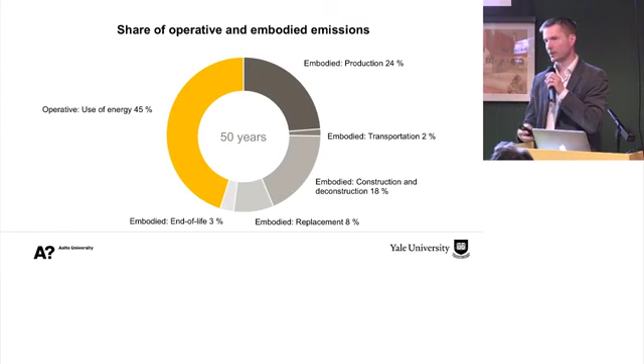The good news, however, is that most of the emissions are a consequence of direct design choices. And those of us who work as designers or construction managers have a great potential and a great opportunity of influencing these emissions. So we truly can be the good guys in this battle towards climate change.

Now, to sum it up, where is the ratio between the quality and the harmful impacts? Are the harmful ones winning? We can say that, of course, there is lots of quality in the architecture and function. There's lots of environmental quality in the storage of carbon and uptaking of that on the site. And there's lots of quality in the energy efficiency and use of renewable energy.

However, we have life cycle emissions from the construction, and we have emissions from the land use change. It used to be relatively close to natural state, at least there were trees growing. So there is a change of the land use and land occupation.

Now let's get to this question. If we compare the emissions, the harms that the building is causing, to the good things, the sequestered and stored carbon, we can see that it's actually half of the embodied emissions. But still, even though this building, in my opinion, is a very high quality building with good technology and wise design choices, it's still not doing that well. This is not a fault of the designer. This is something for the whole construction sector to tackle.

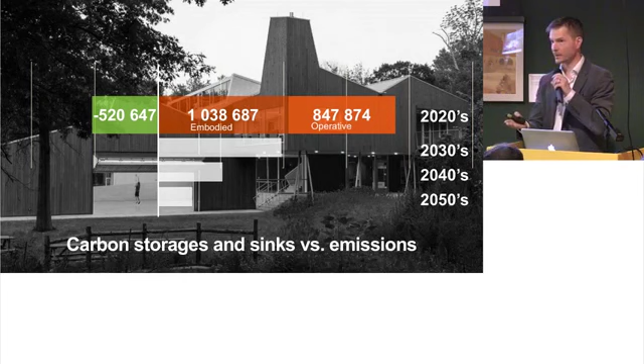And if there is another sector that is fully carbon negative, how much do we assume would be the cost of compensating emissions for the sake of making buildings? And what would be the impact on construction prices, and again, on living costs in cities? These are very big and fundamental questions that are not yet clear.

But let's get to this: we should do no harm. We should think about these things while we are designing buildings. In my opinion, we should try to stuff as much carbon from the atmosphere into the wooden or bio-based parts of buildings while we design them. That seems to be one of the best options for making new buildings in the future. At the same time, we should maintain natural habitats in the state in which they can sequester carbon from the atmosphere, because this is by far the easiest and cheapest way of removing carbon from the atmosphere, putting that into growing forest.

Now, I have spent my time, and I think maybe now it's a good time to continue the discussion with all of you. Thank you very much.

Sometimes these lectures about environmental impacts turn to doomsday, but you brought a lot of good news. What is your opinion, is there more bad news or good news?